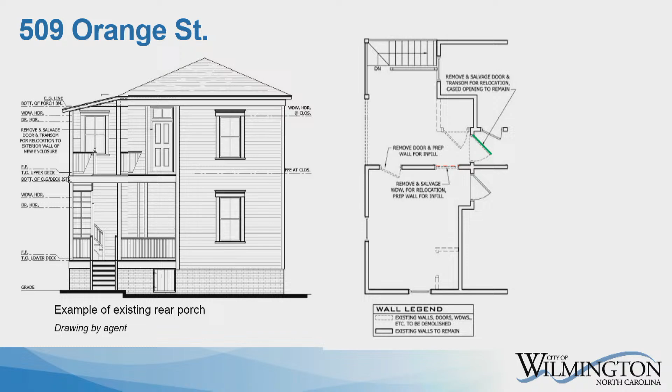If the commission elects to issue a certificate of appropriateness, staff recommends the following conditions. No other alterations to the house shall be made as a result of this project. No mature trees or historic landscaping shall be removed as a result of this project. All construction must comply with applicable laws, codes, and permits. Any changes or modifications to the plan will require additional HPC or staff review.

Staff would like to enter tonight's presentation and report into the records of tonight's proceedings. Are there any questions? Any questions? No? Okay, thank you. Thank you. Is the applicant in attendance, or would their agent like to come forward and answer any questions or provide any additional information? No, I think the submission covers it pretty well.

Okay. Well, do we have any questions about this? Or are we just going to let it go with a staff presentation? Well, we need public. Oh, true. Yes, I'm sorry. Well, sir, I do have one question about this. If you could come forward, please. I don't know if you were sworn in. No, he would need to be sworn in when he gets to the microphone. If you could raise your right hand, sir. Do you swear that the testimony you're about to give is the truth, the whole truth, and nothing but the truth? Yes. Thank you. So my name is James Seaver, and I'm the owner of the house.

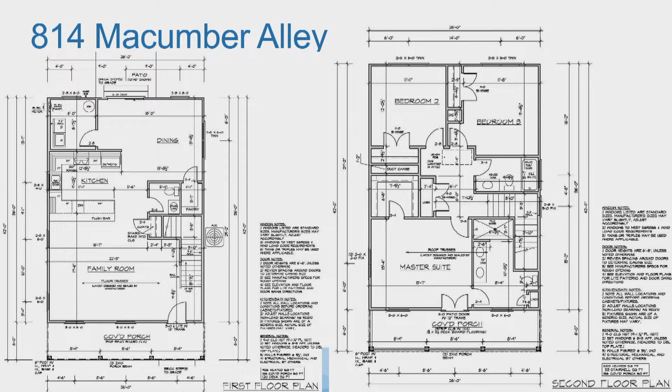The wall section, roof framing plan, and foundation plan provided by the applicant can be seen here. The first and second floor plans as provided by the applicant can be seen here. And then these are the project specifics provided by the applicant.

The applicant proposes adding a gravel parking area in front of the house. The gravel parking area will extend from Macumber Alley to the front of the house approximately 20 feet in width. While generally considered inappropriate for the HDR, several other houses along Macumber Alley feature active gravel parking areas in front of the dwelling, as can be seen in the photo on the right provided by the applicant.

Staff notes that if the dwelling is to be used for homestay or whole house lodging, it is subject to the applicable requirements for those uses as prescribed in section 18-157C and D, respectively, of the Land Development Code. The parking requirements for these uses may preclude the use of the proposed gravel parking area for guest parking as, quote,

guest parking for homestay uses is required to be behind the plane of the front facade of the dwelling unit, except for improved parking surfaces that existed as of March 1st, 2019. Only curb cuts existing as of March 1st, 2019 may be used to provide the required off-street parking for the whole house lodging. If approved, staff recommends the following conditions.

All door and window glazing shall be clear with no tint. All Hardie material shall be installed smooth side out with the texture side hidden. The proposed exterior shutters, even if decorative only, shall appear operable by being proportionate to the window openings, not mounted flush against the facade wall, and constructed of wood. The proposed foundation shall be raised at least 12 inches, but no more than 24 inches above grade on the house's front facade.

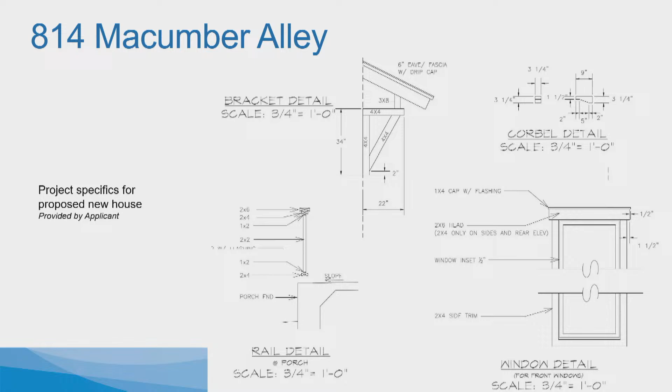Yeah, and therefore we leave this thing open and see if they come back with a design that accommodates that, if that's where we want to go with this. I mean, we don't have to, we could see an alternate design that softens that front edge and have something in the rear to have that outdoor space. Because right now the rear, if you look at the rear elevation, like page 19 of this application, the back is just a double door to a stairs to a flat backyard. There's nothing in the back there.

Well, again, is it possible to take the gable off the front and the back and bring the roof in? Or make it a hip? A hip, yeah, so you don't have that. So it's not as tall, right? That's another option, so there's a way to get that 2nd floor porch. You just have the overall presentation of this, because right now it's currently an 8. You could make the pitch down to a 5 or make it a hip roof. So that kind of reduces this scale, like Ally said, of how this presents.

Would the applicants entertain that at all? We're going to find out in a minute. Let's see what Ally thinks about this. Yeah, I mean, I think it's a really nice design. I think it could fit somewhere else in the district, but in this little stretch it might stand out a little bit, and maybe doing a hip roof could soften it a little, or just doing a 1-story porch. I think I understand wanting to have a porch off the primary suite, that's nice. So curious to hear what you think about a hip roof instead.

And then there's the windows, so there was an option made by the applicant about instead of having a twin window in the rear, having a single, so it works with closet space, swapping a window around to each side. If you did the back porch on the back and then changed the windows in the front, and put more on the side, you would be able to put more on the side if you didn't have the huge doors. Yeah, that could be a possibility too. I just think the outdoor living space is so important. No, it's great to have outdoor spaces attached to the house. Yes, agreed.

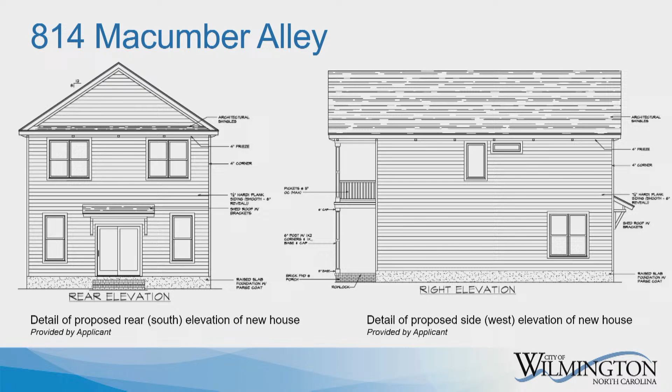I don't think that's the only issue, though. My comfort zone is that it would be resubmitted—if we're redrawing anything, say moving the window to the side, that's much easier to picture. We have a member of the public here who has spoken twice and hasn't been privy to this photograph that's been shown. My recommendation is that it would be resubmitted and continued to the next hearing.

Thank you. I know how construction development works, and you're building something in a historic district that's highly desirable, and people want to be here. This is going to work out in the long-term plan. Sometimes these little things come up, and it sounds like there's going to be about a 4-week delay. Is there any way to proceed with a motion that the existing front elevation stays with the 6-12 pitch, lowering it down?

Well, then you've got the windows on the sides as well. Maybe we'd see if we pass it, and if we don't, then we can readdress that. Oh, but here's the problem with us taking a vote.

Let's say we get it down to a 6-12, and someone makes a motion and we vote on that. If it fails, then you have a whole new application process as opposed to continuing this to next month. It streamlines this presentation when it comes back, and your requirements to get this back to us—because when is the deadline for that?

So if this fails, is it August really? Or July? Can't do July? Oh, God—so instead of this being a 1-month pause, it's a 2-month pause if this doesn't fly with a 6 and 12 alone, which I don't know how that's going to work.

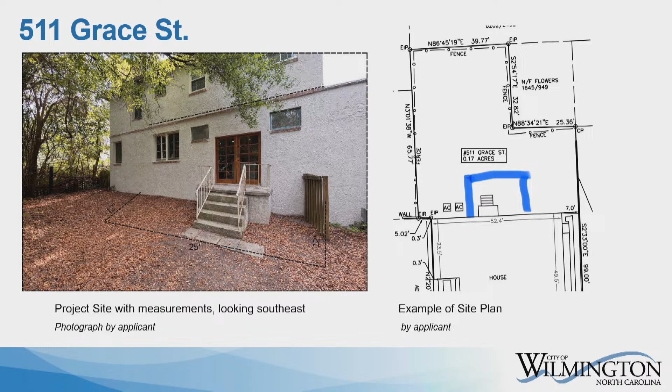The foundation will be a wooden crawl space construction with a 24 by 24 pine wood crawl space access door. Staff would like to clarify that there will be 2 crawl space access doors, one located on the left and one located on the right side of the structure. There will be 3 stucco columns with arched openings constructed. The columns will be an 8 by 8 post wrapped with OSB and waterproof membrane before stucco application.

Here we have the applicant submitted elevation drawings showing the proposed rear elevation looking south. Staff would like to note that this depiction of the elevation was resubmitted by the applicant to better represent the stairway.

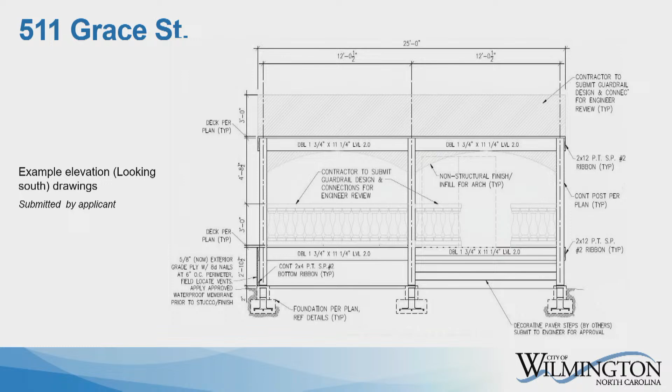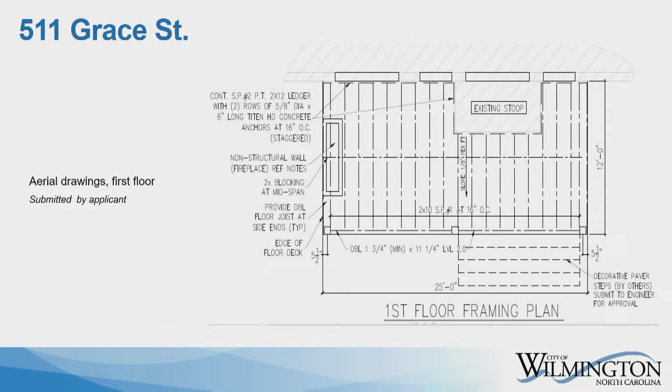A stucco fireplace will be installed on the left side of the lower porch, approximately 72 inches wide by 19 inches deep, centered on the left opening when viewed from the rear yard. Future plans include a vent-free gas firebox requiring no visible exterior vent. A final fireplace design is recommended to be approved through the administrative review process.

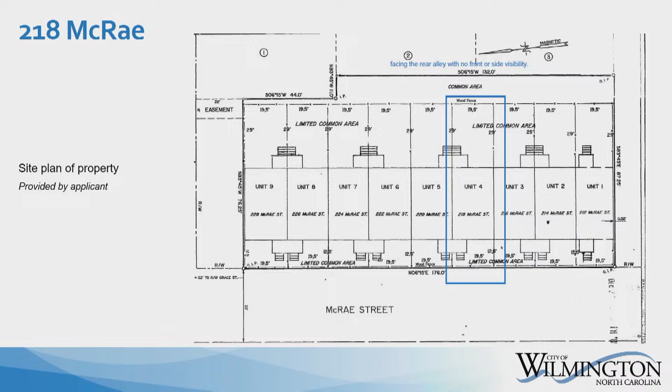The rear facade is visible from the townhome's rear common area and Withdrawn Alley. Staff notes that the rear windows currently have storm coverings. The applicant proposes replacing 6 windows on the rear elevation with Andersen 100 series composite windows. The scope includes 4 individual single windows and 2 single windows sharing 1 opening, all in 1/1 light configuration. Staff notes that the composite windows are a Fibrex material, which is a blend of 40% reclaimed wood fiber and 60% thermoplastic polymer. All replacements will be white in color, same location, same 1/1 design, and as close as possible in size to the existing windows. No alterations to the window openings are proposed.

If the commission approves the request, staff recommends 4 conditions. All windows shall be clear with no tint. There shall be no alterations to the window openings. All construction must comply with applicable law, codes, and permits. Any changes or modifications to the plan will require additional Historic Preservation Commission or staff review. Staff would like to enter the presentation and report into the record of tonight's proceedings.

Are there any questions? Do we have a sample? Yeah, a sample of the window? Of the window. Yeah, because just looking at a picture, it's very difficult. Looked at this one before. I have another question. What is the legal name of this property? Because I have a document here saying it's a condominium, and you keep saying a townhouse, so I'm a little confused on that, too. For some reason, the document here says Victoria Condominium.

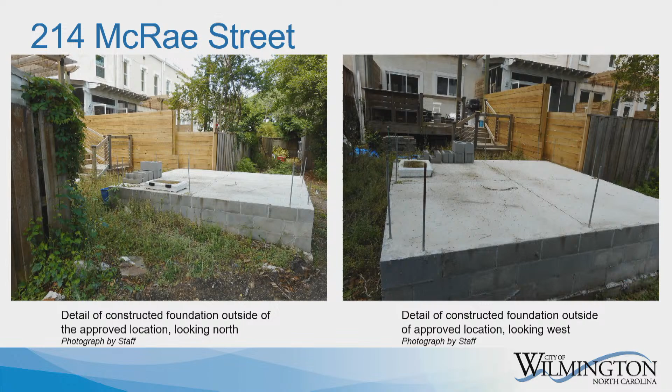The proposed shed will be 12 feet wide by 12 feet deep and 15 feet 3 inches in height at its tallest point. The overall footprint of the structure is 144 square feet. The shed roof would be asphalt architectural shingles by Timberline in the color charcoal, and the proposed siding is 8-inch fiber cement planks. The windows on the front elevation will be centered over the upper portion of the facade, and the entry doors will be French doors offset to the right of the building.

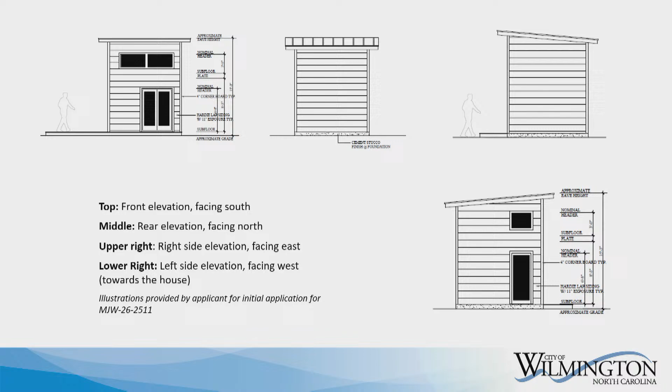The left elevation will have a single entry door with a small single window directly above. The right and rear elevations do not propose fenestration. All windows and doors will be Pella Impervia fiberglass, non-vinyl windows. A large mature tree, thought to be an ash tree, is located approximately 113 inches from its nearest point to the foundation. There are no major branches over the foundation for the accessory structure, as can be seen on the photo to the left.

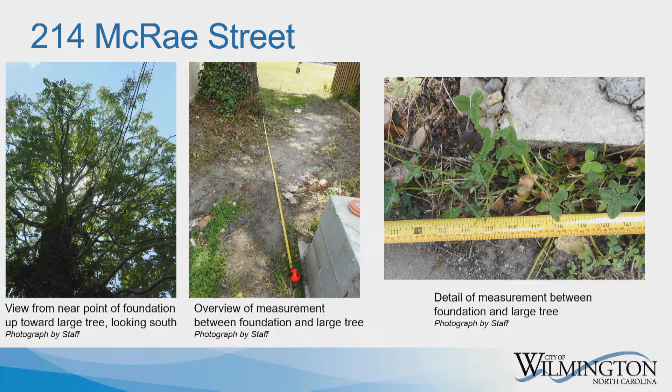Staff notes that in a letter dated January 14th, 2026, Shelley Grindoff, president of the Victoria Condominiums HOA, details that the HOA voted to allow David King, owner of Unit 214, to make use of an 8-foot extension from the designated limited common area into the communal common area, as has been granted to other units in the complex. If approved, staff recommends the following conditions.

All cement fiberboard shall be installed smooth side out with the textured side hidden and a maximum reveal of 5.5 inches. All construction shall comply with code, and any changes to the project shall be reviewed. Staff would like to enter the presentation and report into the record of tonight's proceedings. Are there any questions? Yeah, I don't know if I was here for this meeting when this was approved originally,

because I'm looking at the case overview, and the applicant is requesting after-the-fact approval of the location of an accessory building, but you make it sound like we are re-reviewing something that was already approved, like the fiber cement and the window and the door. I was just providing a reminder of what was already provided. Okay. I should have been a little clearer about that. So that's all been approved? That's been approved, yes. Now it is just the location, right? Yeah, instead of the red line on the box, it's now the blue line on the box.

Has an arborist been consulted at all about how close that is to the ash tree? No, as far as I know. Ben, is that any kind of an emergency easement? It's just kind of strange the way that back alley is. Is that supposed to be for fire trucks or something back there? Or is it just a common area? There's no easement over it. No easements, nothing. As best as I can tell, it's just a common area. Okay. There are two, technically common. There's a 21-foot common area and then an 8-foot extension to get the 29 feet.

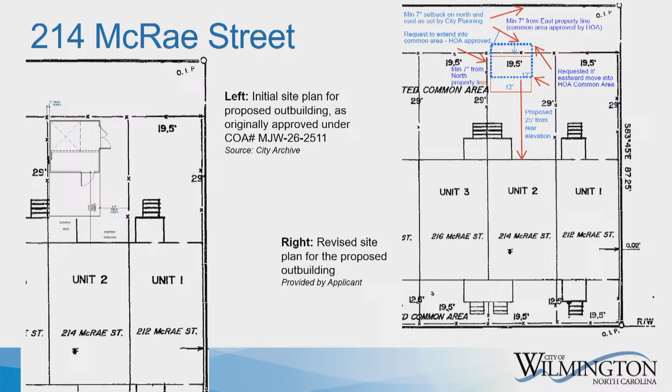And then, like I said, informal HOA discussion, when we had those discussions of reclaiming that alley as it became a problem, we moved it, and it wasn't appropriate, and we got stopped at inspection. We passed several inspections before that was caught, and they asked us to stop. They told us that needed to go back to historic review. We thought after we presented the HOA letter that would be enough, but Ben and his people were able to inform me that wasn't enough. We now needed to come back and go through review.

When I read that letter, my initial fear was that this current version of the HOA may be fine with it extending into that common area, but that a future HOA may have something to do with that, and they'd be kind of out of luck because someone had already brought this building in. But if your whole group now is deciding just to go ahead and take that over, I'm not as concerned about a future HOA being hamstrung by what this current HOA has done. You know what I mean? So.

Unusual situation. Yeah, it certainly is. Any other questions for the applicant? No? You might want to talk to a lawyer about amending your declarations on this, you know, converting the common to limited common or doing something legal, just because he's right. Some board can come along in 10 years and go, we don't like any of this, and then it'd be a big fight then. So just do it legally the right way and get it done.

Okay. Thank you. Yes, sir. Seeing no one else in the audience to speak in favor or against, Commissioner deliberation, would someone like to make a motion, or do we have additional thoughts about this? If I may, if there is a motion to approve, may I ask that you add the condition that it is subject to all conditions that are not inconsistent with COA MJW-26-2511?